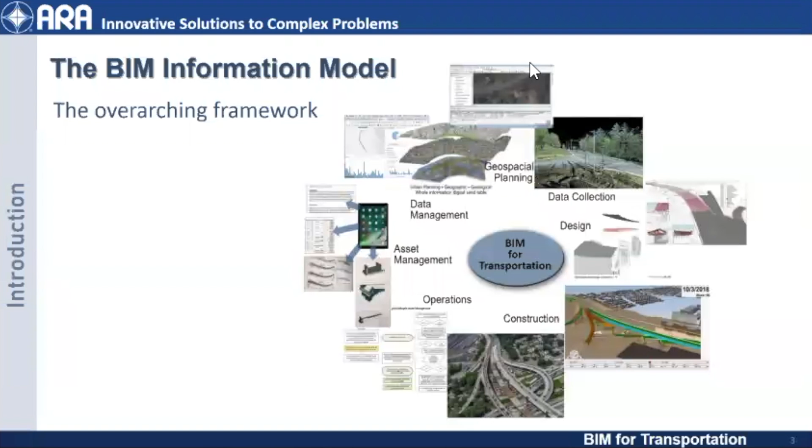This is an example of how that process works. It's a cyclical process. That data is used throughout.

Okay, and just a quick explanation of 2D versus 3D and the new process that New York State DOT has instigated. We look at these plans and we say, this is Kew Gardens 3. Okay, here's the new design.

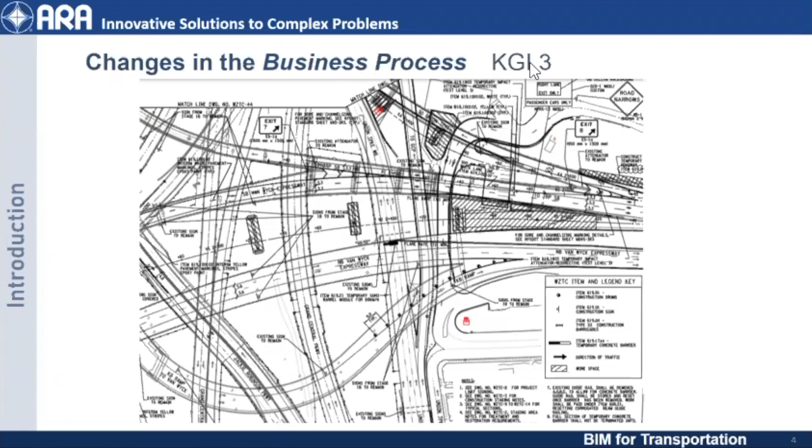Well, our process did include now a review, a quality assurance review of the model. It was developed by a consultant, and we internally were saying, wait a second, we're putting this out to bid, we need to check this model very thoroughly. And so when we did, we noticed a few things here - we had a couple of 36-inch water lines that were acting like speed bumps.

So it's a part of the process that has to be implemented within your DOT. I'm going to be speaking to people as if the audience is DOT. How many DOT folks do we have in the room? Okay, good. So this is an important new change to the process.

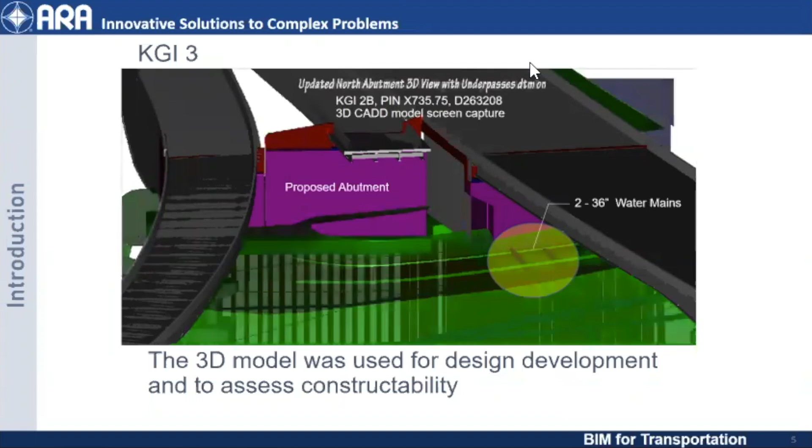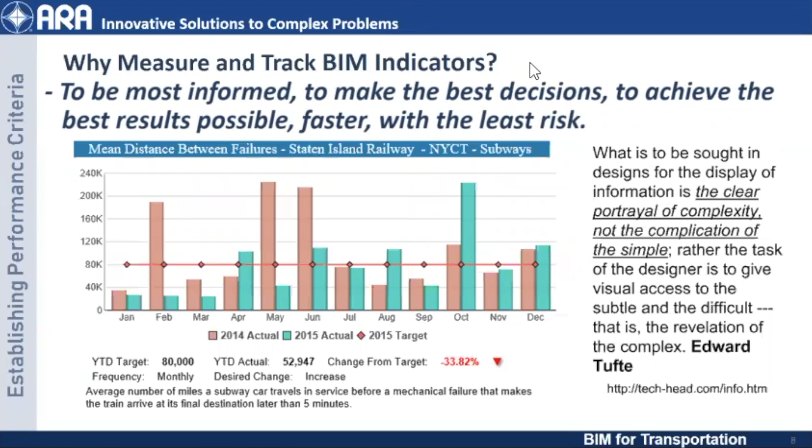So why do we measure and track BIM indicators? And the heart of it is to be most informed, to make the best decisions, to achieve the best results possible, faster, and with least risk. That's what it's all about. And that's what New York State DOT is doing.

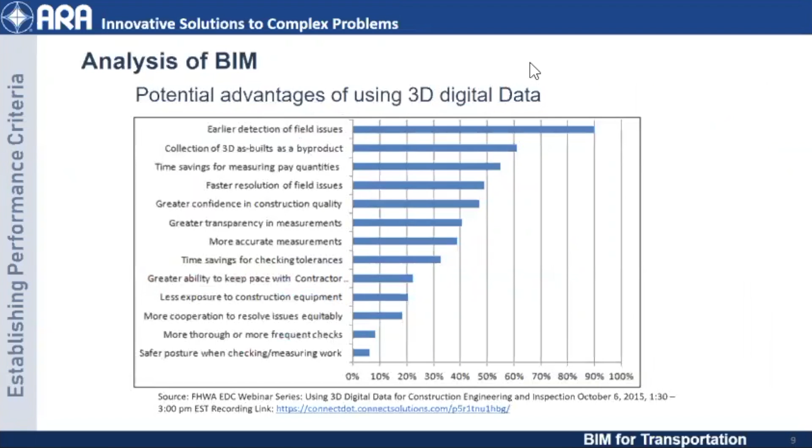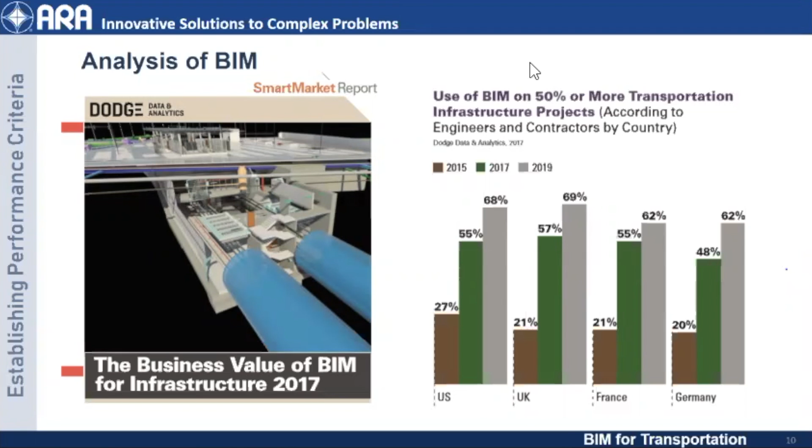So I think you've seen this in other areas. This is kind of a macro approach of why do we approach BIM. And this is a great resource, the Smart Market Report on BIM - the business value of BIM - extremely important to get your mind around these kinds of information sources to help us better understand BIM and implementing BIM. Impacts of BIM.

Okay, we've got this from a macro point of view. Now New York State DOT wanted to look at, okay, let's measure it from a project and a portfolio perspective. And this is just a quick plug on dashboards - with our Recovery Act program, we had to have a dashboard that told us how we were doing with this, because we had to report this data back to the federal government.

More and more with the federal highway law, we're going to have to report our progress with the program development, with planning, with construction, with operations on a macro level.

Dashboards are an easy way to do that. We tailored this to suit our needs, to report on those things that were important to us, whether it was DBE targets, whether it was spending, whether it was building up economic areas. We built our own dashboard, and it's easy to do, but very, very important.

Here are our performance indicators. I've added a couple since the last time I mentioned this, back in February. Constructability, and these came out of a strategy mapping process within New York State DOT, done back in '06 when I was the strategy and performance director. We looked at all our projects in the program, whether down in New York City or out in Buffalo or Rochester, it didn't matter where it was, up in the Adirondacks.

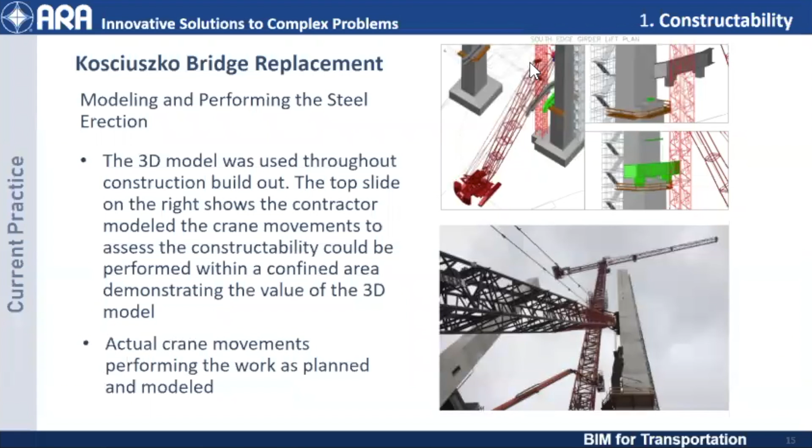So the first one, constructability. Constructability is measured by buildability and bidability. During the build-out process, and even at award, the contractor's looking at how are we going to build this project. Most of our projects for the BIM world are down in New York City, a very complex urban environment. As the build-out occurs, this is an actual example on the Kosciuszko Bridge, K Bridge. We didn't know whether we could get a crane in there to lift certain members of the pier. So what they did is they modeled it first, tested all the movements, a digital twin kind of approach, and said yes, we can do this. They did it in the field and it worked without flaw. So that's constructability.

Bidability for constructability is at award. So when a contractor is looking at the model, can they build this and do they trust the data? That's what they look at that model for. And that model is more complete now than a typical set of plans. It gives them more reliable data in terms of original ground, et cetera. So what happens is they provide a more certain bid. And so what we were finding is the bids are coming in lower because of the BIM model, because there's not any guesswork involved.

Okay, schedule adherence. So now with BIM, we have these tools available to us. The critical path is scheduled and mapped to the model, so we can analyze on a day-by-day basis where we are with the schedule. They can map it out. The contractor can do that to say, by such and such a date, we're going to be this far complete. A couple of years ago, we had a data point at award and a data point at almost completion, so we didn't have a lot of information in between to say are we on schedule or not. Now we have tools that we can look at and analyze on a regular basis. And so we defined when we'll get together and look at the schedule with the contractor, and I'll talk about that in a little bit. This gives us a real capability that we didn't have in the past.

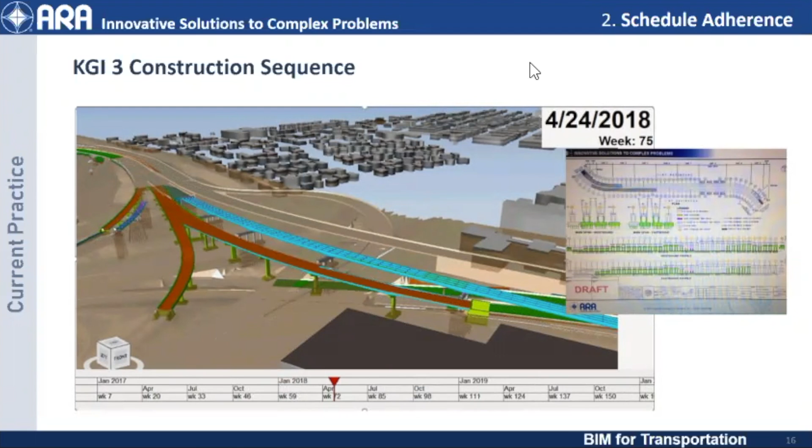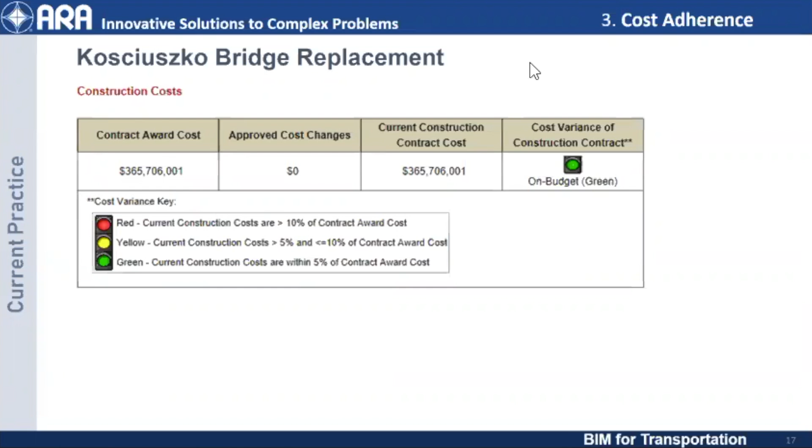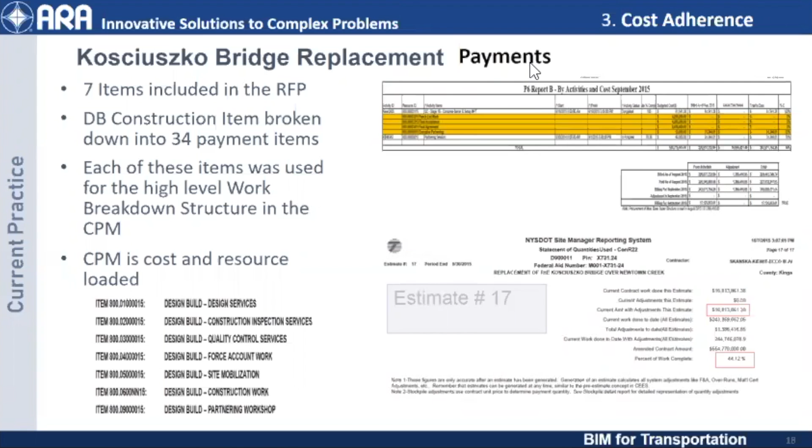Okay, cost adherence. Super important, especially to every DOT, but certainly to New York State DOT. So we have this little dashboard up on our internet site for every project. With each and every project that is a BIM project, we've stayed on budget. With the K-Bridge, another development and innovation was we also did a 5D animation. So 5D is tying all your payments to the model, so payments correspond with work performed, which is demonstrated by the model. And that's what occurred with the K-Bridge, and that worked flawlessly. This is just an example of how that was done.

Quality. Quality really gets to level of development. We specify every element by LOD in our spec, whether it's design bid build or design build, and it's reviewed as a project is developed so that we understand what the level of quality is going to be for every item so we can assess it and review it. Again, it gives us more information to review as the project's being built.

We know the level of quality based on the level of development. We can tell how things are going to be built out, and so it helps our quality immensely.

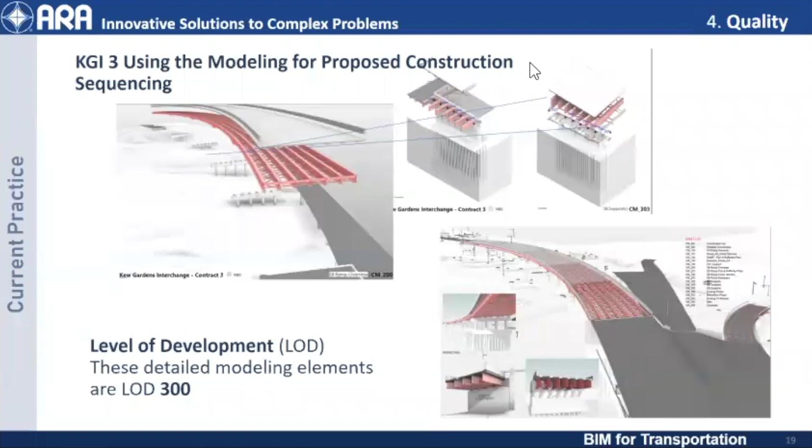I was going to do this survey, but I don't think we have time here today, so I'm not going to do this. So, project management and control.

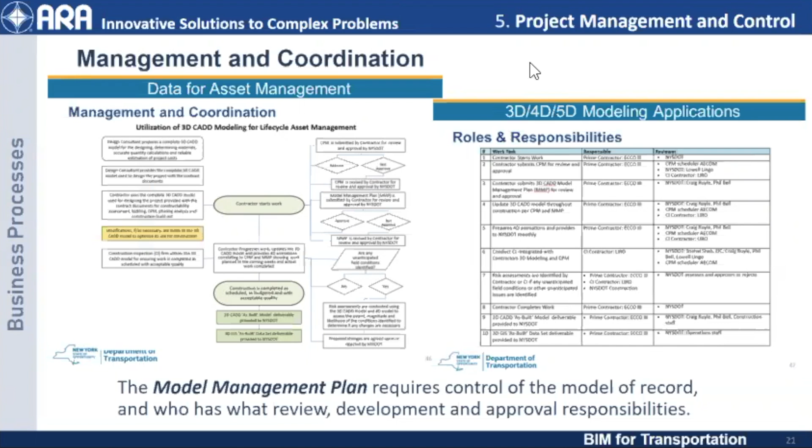BIM offers a considerable advantage here. In New York State DOT, we had a model management plan for every BIM project. With that plan, everything is specified: the process, who's making what decisions throughout build out, throughout design, and into operations. Our roles and responsibilities are described and laid out in the model management plan. So we have an expectation set, and we know who's accountable for what.

So for project management and control, this is extremely valuable. Every quarter, we would get together with the contractor, the construction inspection consultant, the designers, and all the support staff, and say, okay, we'd play the 4D animation, stop it at that day, and say, here's where you're expected to be, where are you? For communication and coordination, there's not a better tool in the world to have that kind of discussion. This took place regularly, and it was extremely effective.

More management and controls examples. It gives you an ability to manage your project on a day-to-day basis, or very closely, instead of letting the contractor go for a couple of years and saying, oh, how are we doing?

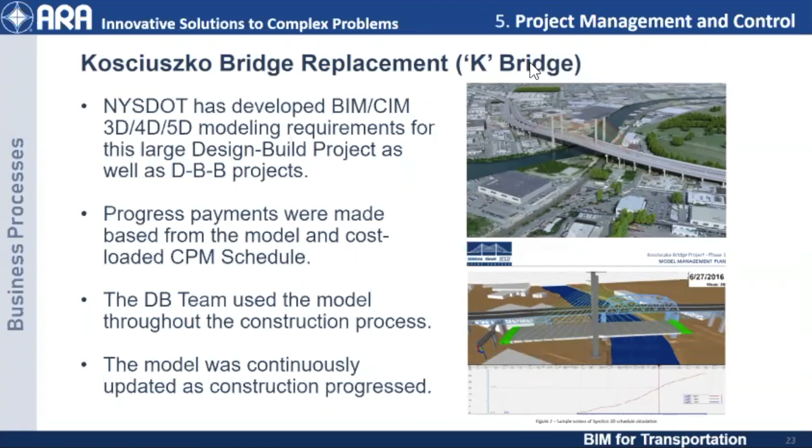Okay, let's see, I'm going to play this little animation here. I can find my mouse. Maybe I won't. This is another animation that just shows the 4D modeling tied with the 5D. I'm not going to play it.

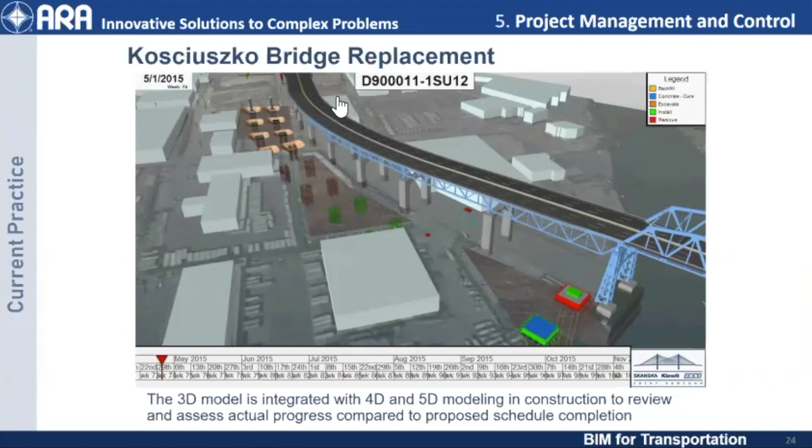So again, for project management and control, anytime we wanted to, during this project anyways, we would put a drone up there, fly the project, take a look at where things were in the field to make sure they correlated with the model. So again, another ability to manage the work.

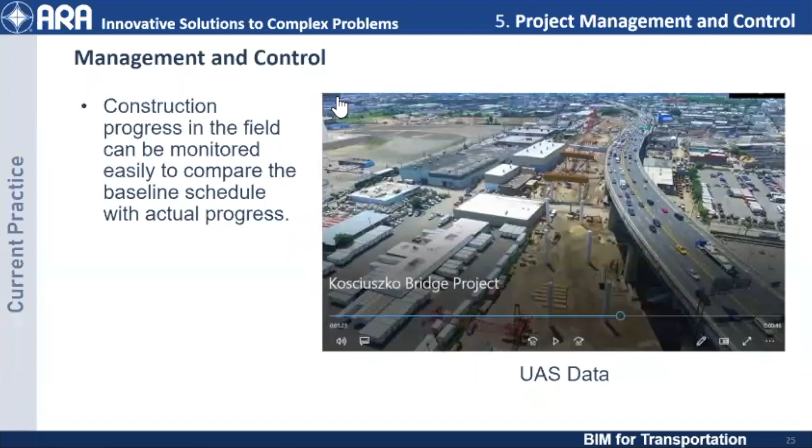This is an example of the model and examples in the field, and this was one of our first projects that we wanted to assess. Is the model really accurate, and is it on schedule as we anticipated? And this demonstrated that it was.

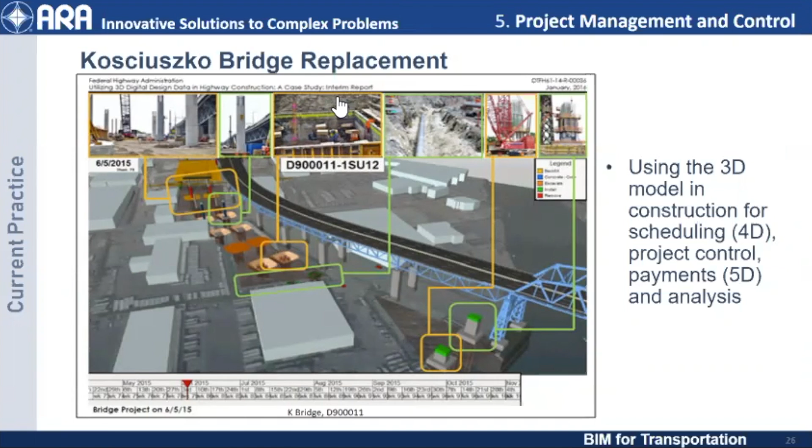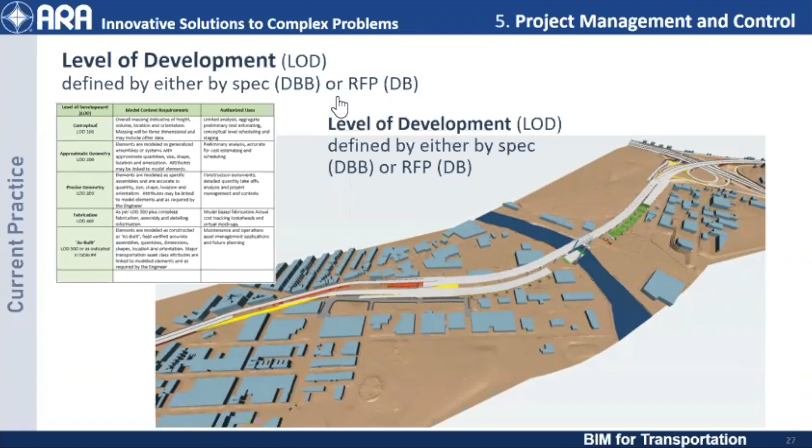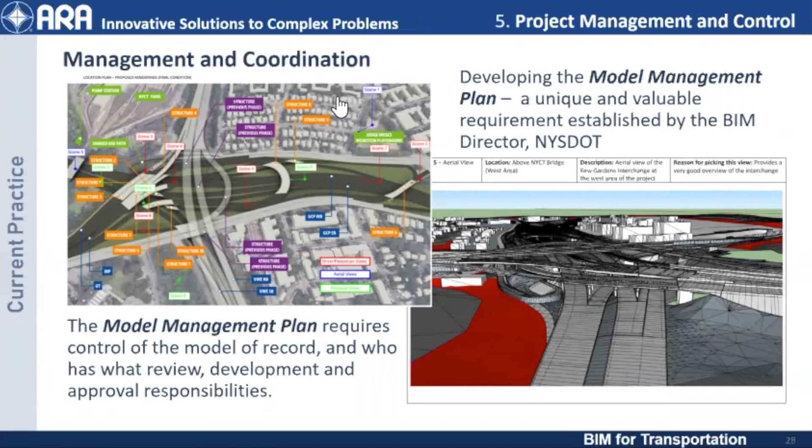And this is Kew Gardens 4. Again, more examples in the project development process, looking at, okay, here's where we need cameras set, here's where we need images for, could be public involvement purposes. We have the model to say, okay, we're going to specify 10 locations where we're going to use throughout the process for public information purposes, or we need to monitor construction on these particular structures, so we're going to describe that cameras have to be set there so we can monitor the work. All again, helping us with project management and control.

Risk management, hugely important. There was a great slide on the Big Dig. Well, the Big Dig, they probably wish they did a real thorough risk management plan. I doubt they did. BIM gives us a better ability to look at and assess what are our possible uncertainties, external factors, internal factors. It gives us a chance to look at all that in a comprehensive way, and it makes us pay attention to risk a little bit more, which is a good thing.

So our risk register is tied again to the project, the model management plan. Again, all collaborated in a much better coordination.

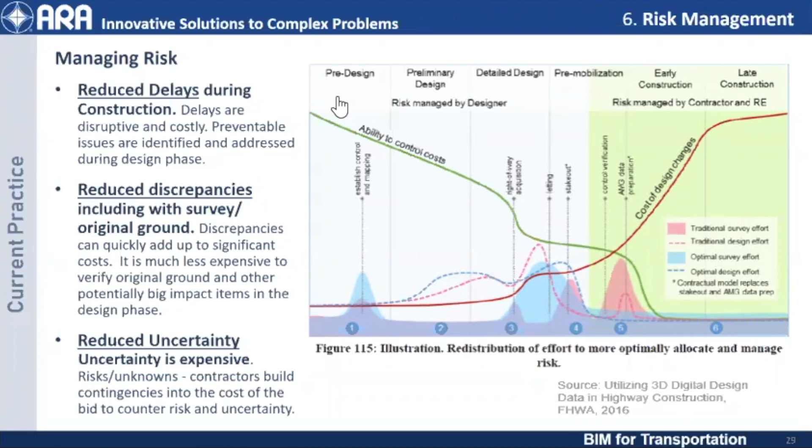Little things - innovation. This came from a project from the field office saying, okay, today we have to do these passes with our machinery. Now we can look at it from a different perspective, and if I can find my mouse, I'd play the animation.

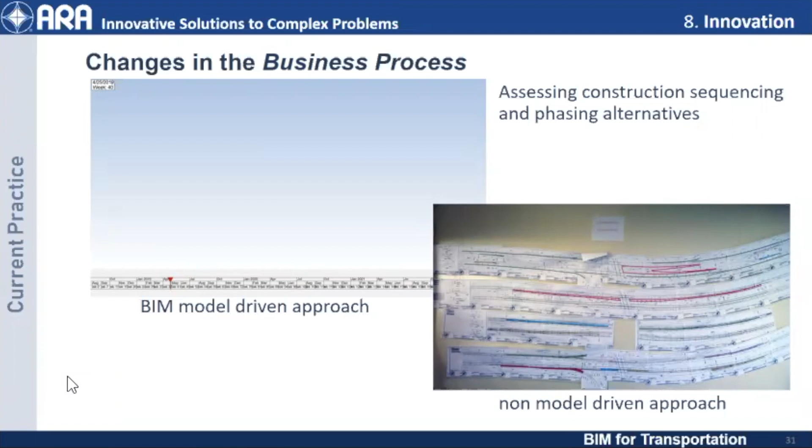I don't have my mouse to play it here, unfortunately. So the BIM model-driven approach was on the left-hand side. I'll have to describe it to you. Instead of showing it on a plan every day in the field office, it was an animation showing what work was going to take place that day, with a slider on the bottom. Everyone, the modeler, the equipment operators, the AMG people, all knew what that work was. I apologize for not being able to show it to you.

Two minutes? Oh boy. Okay, so safety. Again, BIM gives us the ability to know what work is taking place when. It's a safer environment. This shows airport work as an example, so there's less unknown in terms of what's happening on the construction site.

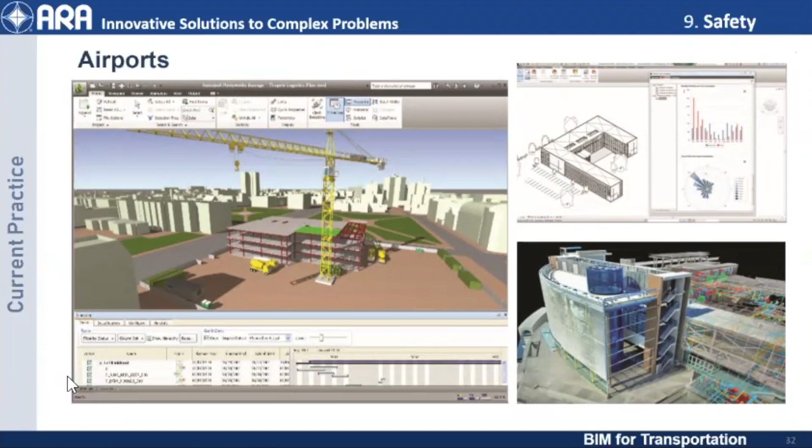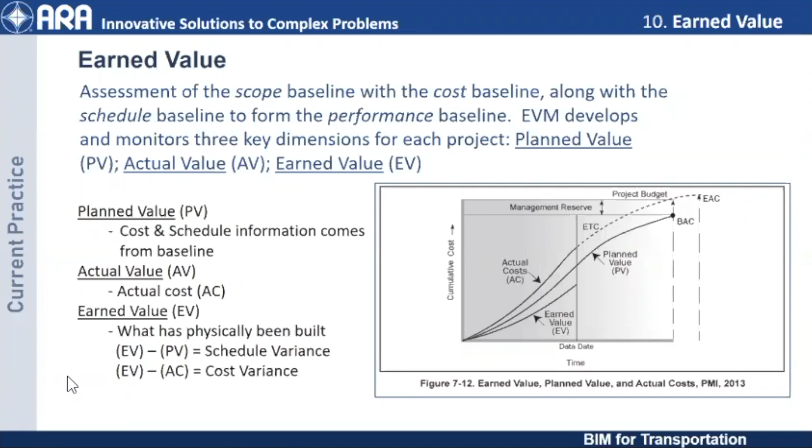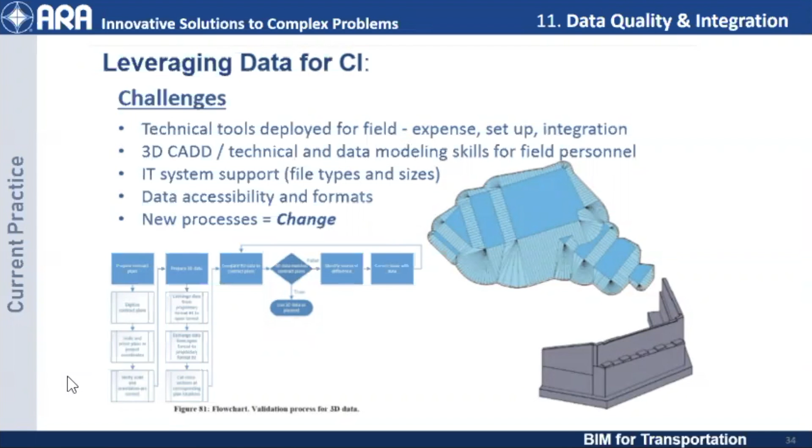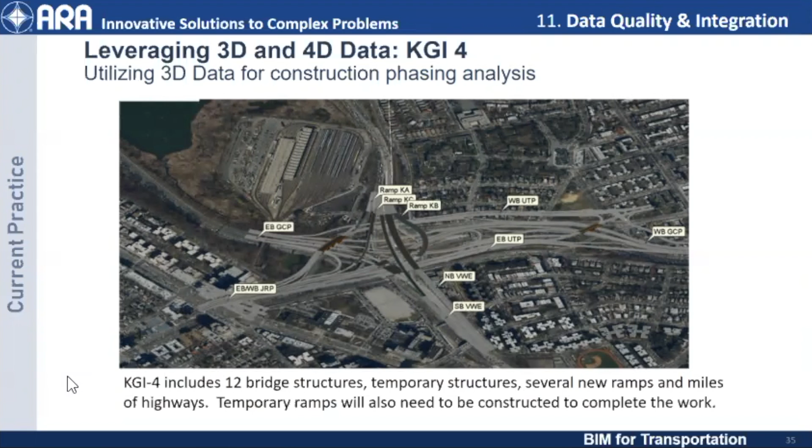This shows data quality and integration, again from planning into design into construction. In the design, we had built an animation showing the build-out of the project. This is Kew Gardens 3 and 4. We were able to start both projects, Kew Gardens 4 especially, six months early, because we had the knowledge of what work was taking place with Kew Gardens 3. We could analyze that, and it helped us advance the project faster.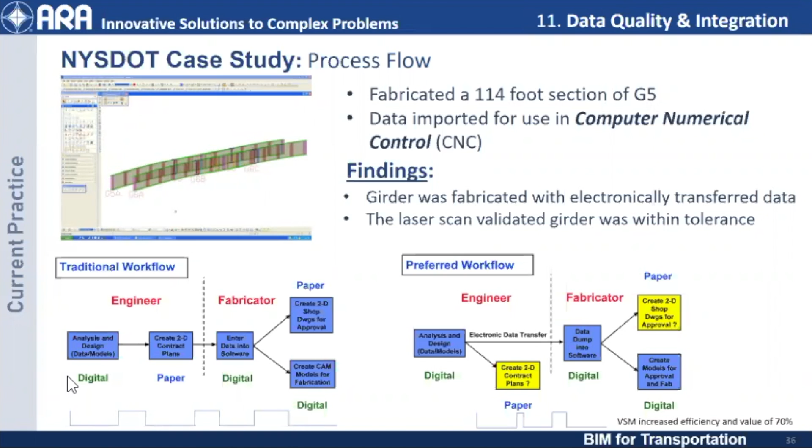Data quality and integration, again, with fabrication. We did some tests with the fabricators, sent them direct files, and eliminated about 70% of the waste in the value stream. Again, just leveraging data. You have to think about it as information that's to be leveraged.

Benefits. We've got pages of benefits I didn't want to go into here. These are from our construction office, from all our BIM projects. I'll just touch on the accuracy of the data, which really helps achieve many things: reduce risk, reduce delay, better methods, improve communication. Now New York State DOT is doing a 3D model as a contract document, and we had to address that sign problem. We've got an example of how to do that.

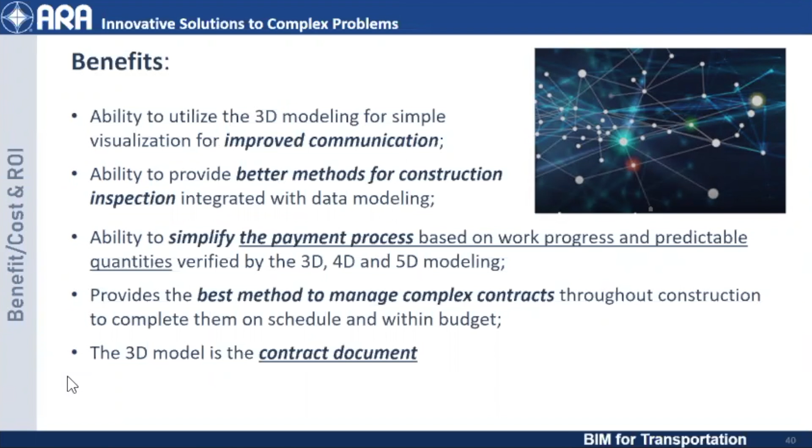So, technology. Some of the challenges - we talk about benefits, we have to talk about challenges too. IT is certainly one of those challenges, complexity. How do we use this data? How do we integrate this data throughout all our different divisions, which are siloed? That's something we have to work through.

Technology internally is hard for us to keep up with, based on our processes and our purchasing capability. That's going to be a tremendous challenge going forward. And from a macro perspective across the country, there are inconsistent approaches by DOTs. How do we develop a set of standards that all DOTs can use as a framework? That would be very helpful.

Very interestingly, we talked about agriculture earlier. Agriculture has made tremendous leaps and bounds. Fifty years ago, they used horses to do crops. Now today they have machinery that uses AMG - it's phenomenal. They use robotics in the barns to milk cows. It's incredibly innovative. Transportation has to get there. We're starting to understand the value, we're starting to go there, we need to get there.